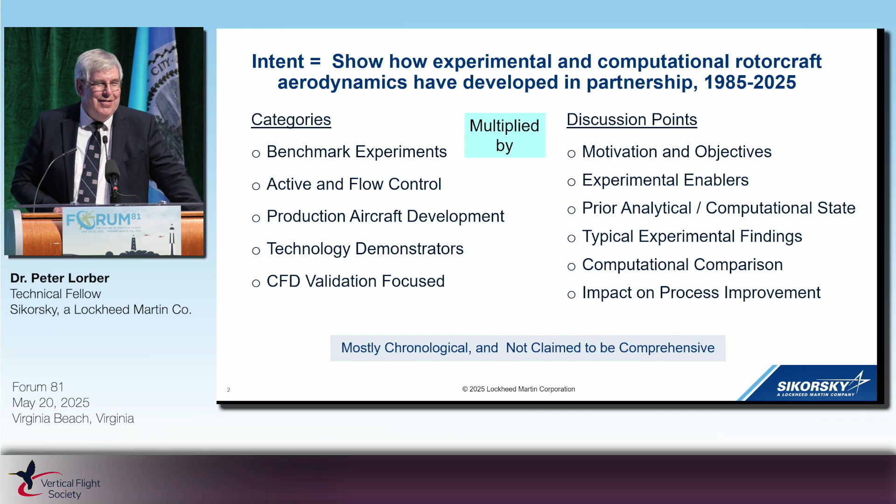This is mostly chronological. It's not planned to be comprehensive, and primarily because of the ability to get it approved through our systems, it's focused primarily on things that I and my colleagues have been involved with that have been previously published, so we didn't need to go through a lengthy approval cycle.

The first topic is benchmark experiments, and the first one is oscillating airfoils and wings, which are seemingly simple geometries but needed a very significant amount of care to get to the appropriate answers. The motivations in this period, the mid-1980s, were threefold: rotor blade dynamic stall, of interest to the helicopter community; fixed wing supermaneuverability, of interest to the Air Force at that period; and propeller stall flutter, of interest to our partner company at the time, Hamilton Standard. The idea, starting on the upper right, was an 8-foot wide blade section sitting in the UTRC wind tunnel, trying to get to realistic Reynolds numbers in the millions and Mach numbers up to 0.6.

The key experimental enabler at that point was the availability of compact, thermally stable pressure transducers that could be put into many different types of models, in this case the wing. The second enabler was a fully digital unsteady data acquisition system. It was immature at that point, but it was a great improvement over analog tapes. Also important was the ability to use high-powered hydraulic systems to generate any waveform of pitching motion of this model that you wanted.

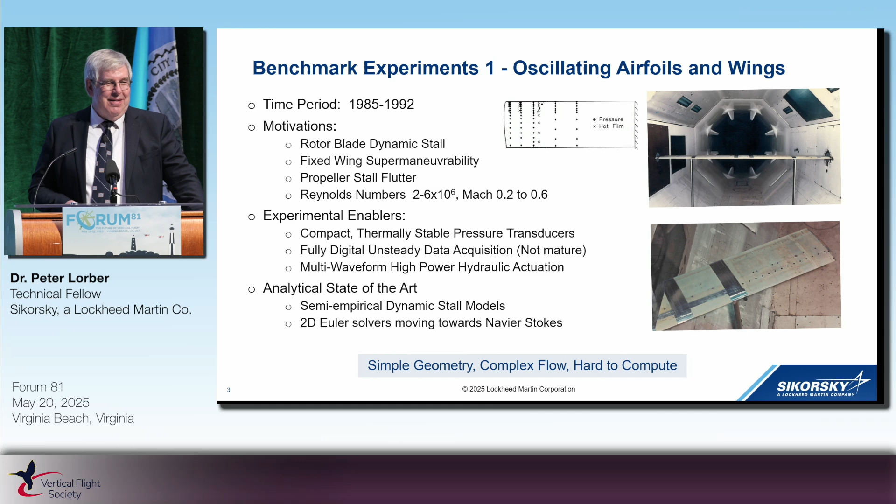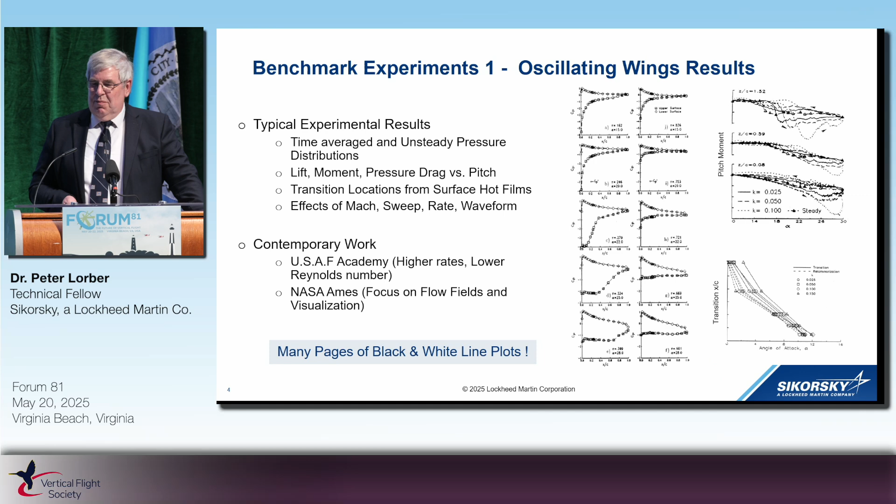Typical experimental results were many pages of black and white line plots published in that period. Color imaging was a luxury item that was expensive and complicated to do, and even more expensive if you wanted to publish it. So we were measuring pressure distributions, lift, moment, drag, laminar-turbulent transition, and the effects of all the independent parameters. Contemporary work at that time was done at many places, including the US Air Force Academy and NASA Ames.

Computation early on, in the 80s and 90s, was starting to use Navier-Stokes solution methods with relatively straightforward turbulence models. They didn't do a bad job here, they didn't do a great job. More recently, things have gotten much better - higher resolution, improved separation, separated flow, transition. It's still a struggle for these full-scale conditions. Large eddy simulations in 2017 and 2022 have been done at increasing Reynolds number, but it's still a computational challenge to get the details of the flow proper at these high flight conditions.

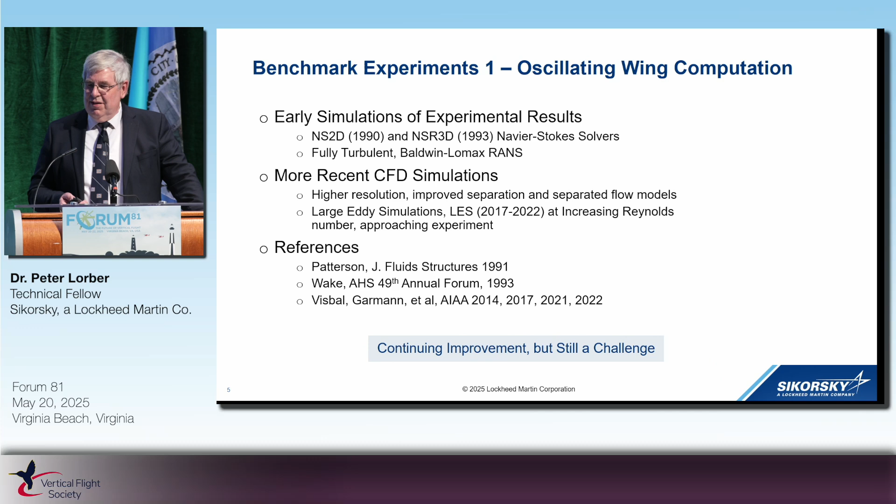The second series of benchmark experiments were on a model helicopter rotor. This was slightly later, from the late 1980s to mid-1990s.

The motivation was a multi-measurement comprehensive data set so that analysts could combine blade air loads with far-field acoustics, and blade air loads with bending and deflections of the blades. We wanted to expand the test envelope from relatively simple and safe conditions to high speed and thrust, and to change the tip plan form. Importantly, we wanted to compare a UH-60A model rotor, about 10 feet in diameter, that we were testing, with the full-scale airloads blade that Sikorsky was producing, which NASA Ames and the Army were going to flight test.

Again, the enablers were the pressure transducers - in this case, we were able to put 176 onto this small rotor blade. Data acquisition was more mature, and we had composite rotor blades with repeatable structural properties and long life. Importantly, this was a partnership between the US Army, NASA, Sikorsky, and UTRC. There was some money changing hands, but a lot of intellectual effort changing hands between all these partners over that period. The analytical state-of-the-art was again relatively simple: lifting line, prescribed wakes, comprehensive codes, beam models, 3D potential codes, starting to get to Navier-Stokes.

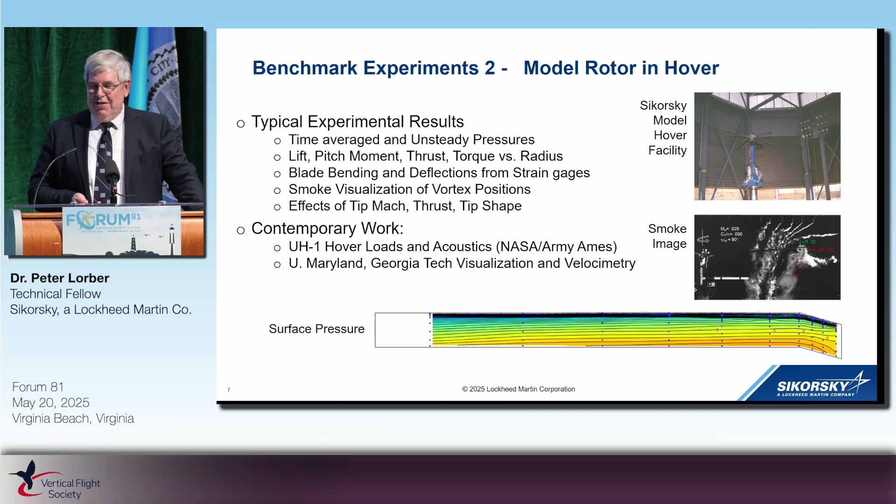Contemporary work - the Ames NASA Army folks were doing things on a UH-1 rotor before that. There was other hover work being done at somewhat smaller scale at Maryland, Georgia Tech, and other universities. Just to show that you can take data that was acquired before and make it color, that was the surface pressure contours shown at the bottom of the slide.

There were other DNW test campaigns that the Army and NASA did in collaboration with other industry partners. There was also a very large-scale complementary effort by NASA and the Army, taking the instrumented blades, doing flight testing in the 90s, and then going back and doing full-scale wind tunnel testing within the last 10 years. So this has been a long-term effort that's had a lot of benefits for the community.

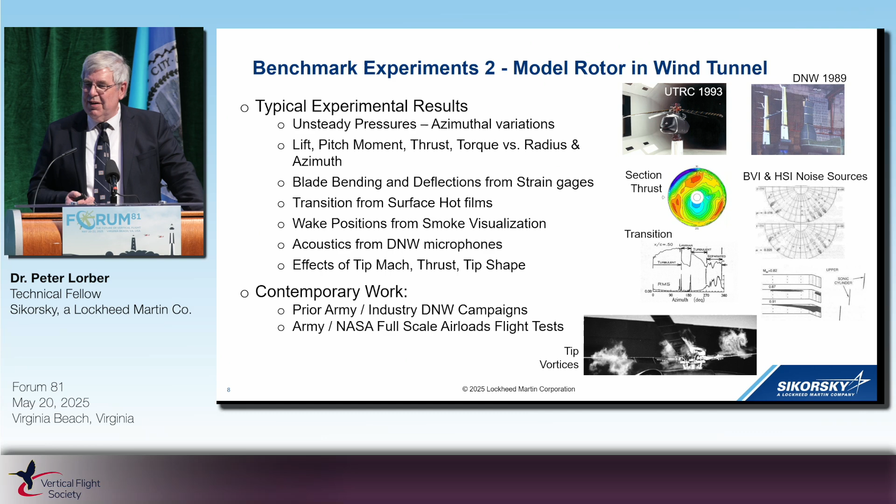CFD comparisons early on were trying to combine a little bit of data with a little bit of analysis. Prescribed wakes for hover had fair correlation. Taking the measured pressures and adding acoustics was reasonable. Taking the measured aerodynamic loads and adding the dynamics analysis back in 1992 was fair.

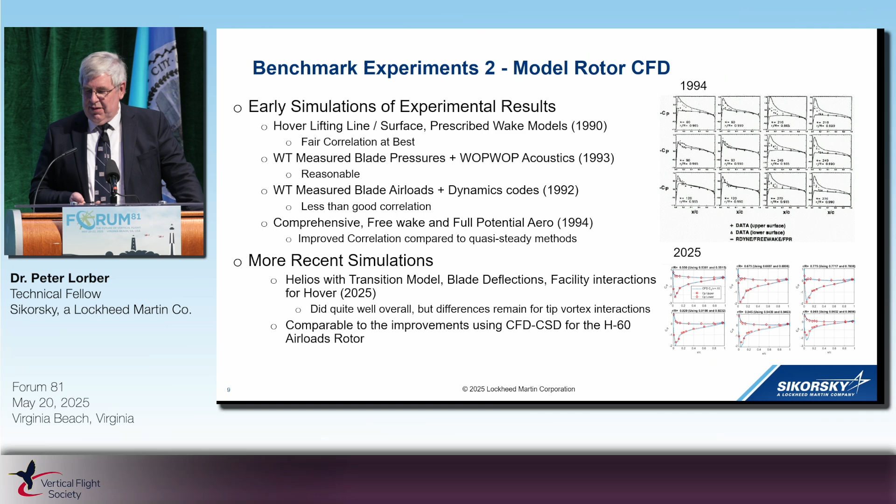Going the other way, trying to model the whole thing again was better but not great. More recently this has all been vastly improved analytically using transition models, blade deflections, and interactions. This is the most recent work done in hover that did quite well. There are still some differences, and this work is comparable to all the improvements in modeling the H60 airloads rotor, similarly with the computational CFD, CSD methods of the last 15 to 20 years.

The second major topic is active control. This was a very hot topic starting in the mid-1990s. Our involvement covered a 15-year period until 2010. The idea was to find a way of breaking the paradigm of the passive rotor and improve noise, vibration, and performance. You wanted to develop the required actuators and control systems, and try to identify system-level performance. Enablers were everything talked about before in terms of measurement techniques, but also adding the ability to make rapidly moving actuation and control systems.

There was a lot of work being done in academia from multiple of the people sitting here, Maryland, MIT, MDHC, and Boeing. ZFL in Germany was doing a lot of work on BO-105, CH-53G, IBC flight testing, and all of the HART II activities. The other piece, slightly later, was NASA ZFL Sikorsky UH-60 IBC at NFAC, which was using the same blades that we had built earlier on.

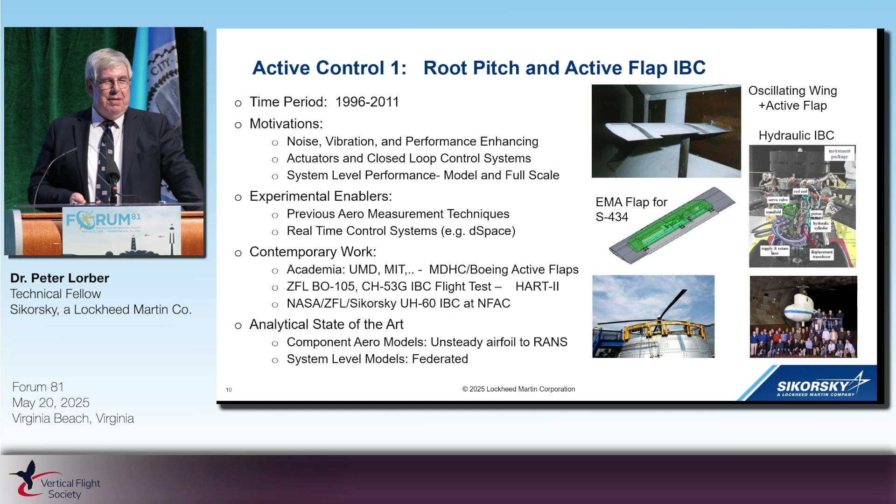So the analytical state of the art at the start of this period were component models for different pieces, an unsteady airfoil. Maybe you're starting to use some decent Navier-Stokes codes at that point, but the system models were really federated. You had a bunch of different models of different types that were kind of tied together.

Typical experimental results: one experiment was putting an active flap onto that same wing model developed before, getting pressures and air loads out to 0.8 Mach number, seeing what happens with your trailing edge flap when you're trying to do it during dynamic stall.

There were a variety of individual blade control things being done at model scale and full scale with a hydraulic actuator, trying to get there. Again, is there a performance benefit? Can you reduce vibrations? Can you help acoustics in terms of BVI? And how well is all your actuation system doing at that point?

Some lessons learned from all of this. The first one, not unique to us, is avoid hydraulic slip rings. Trying to get high-pressure hydraulic fluid into a rotating model without having a large bucket underneath it doesn't work well. Try to avoid inserting complex systems into small legacy flight rotor blades. That also is much more complicated than it may seem at the time.

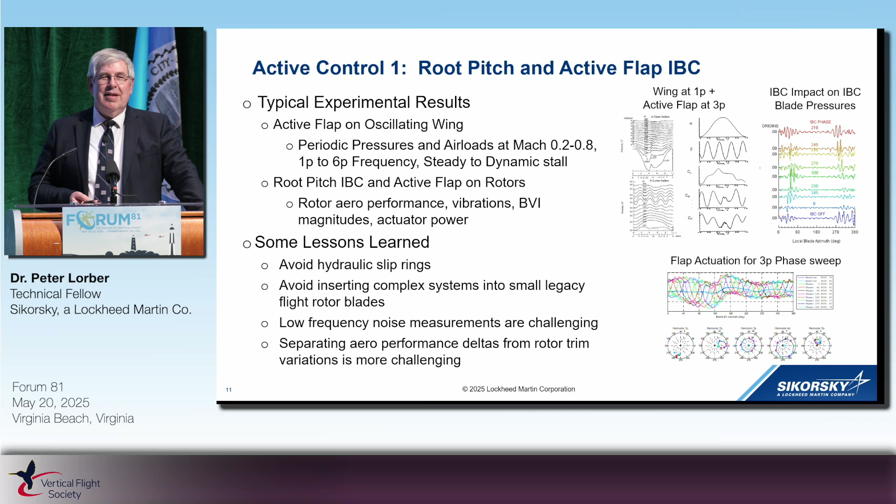Low-frequency noise measurements are challenging, even in very large wind tunnels. And the final lesson here is that trying to separate relatively small aerodynamic performance benefits from the trim of the rotor is also a challenge. But it was very educational through the period, and there are many groups still working on these active control attempts, but again, it's somewhat in the past as far as we're concerned.

The next active control piece is flow control. This was late 90s to 2004. The flavor we were interested in was called directed synthetic jets. Again, you're trying to reduce drag, avoid dynamic stall of your rotor blades, and advance the technology to do that: the flow control actuator designs and the authorities.

The basic idea of this method is that in some way you have a jet of air coming out of your airfoil, going in and out. It's helping to energize the boundary layer over the airfoil, preventing it from separating. The enablers were all the previous aero measurement and control techniques. So you're seeing a theme here that every piece builds on its predecessors.

Another enabler was system design models for the actuators so that you could do a lot of analytical work with a reduced model early on, avoiding too much experimental tinkering. Another enabler in the later period was the ability to do CFD modeling of the coupled internal flow inside the actuator and the external flow. This was part of the DARPA micro-adaptive flow control program going on at the time. We were one of several teams working on that.

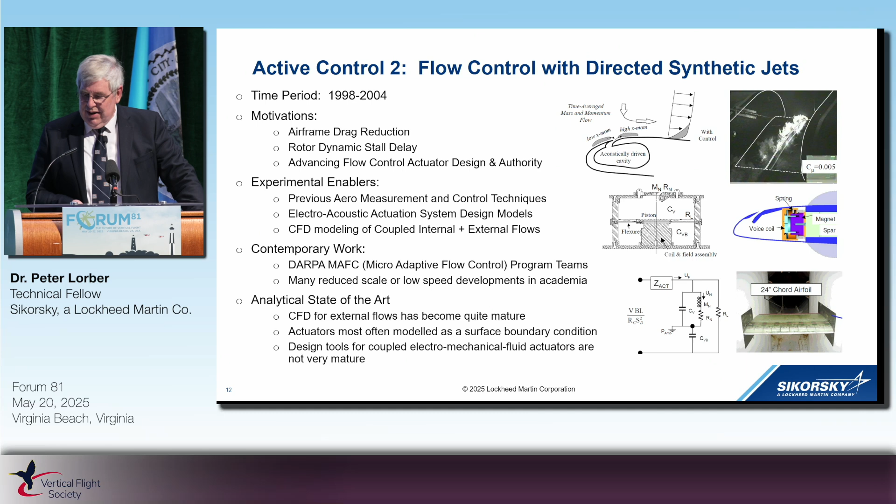There were also a lot of flow control activities going on at that time and continuing in academia. The analytical state of the art by the 2000 period: external flow CFD was quite mature, but these actuators were often modeled as a surface boundary condition. You were only later able to model the coupled system, which proved to be important in predicting the capabilities.

But overall, the lesson learned was, yes, we were able to design actuators that had the authority we needed, but in practice, at these realistic conditions, opening a slot hurts you before your actual flow control is able to help you. So we were limited in the ability to meet the objectives for the higher Mach numbers you'd see on an actual rotor blade.

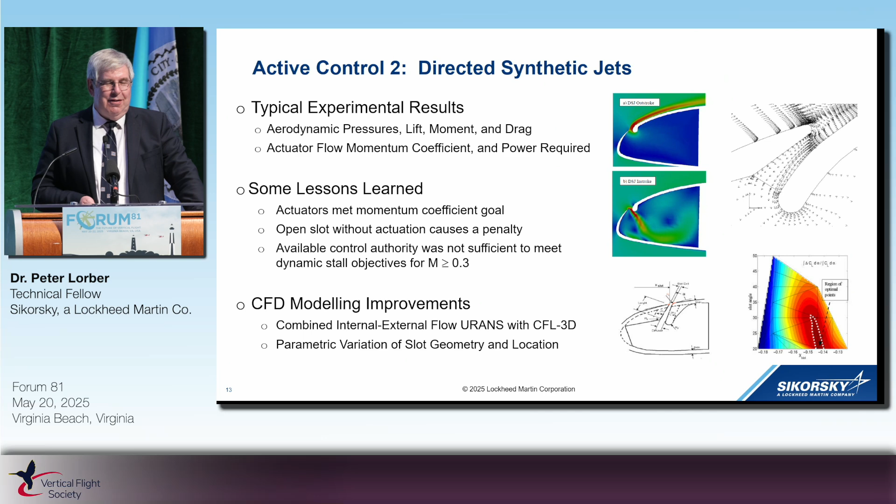So the final piece of this was a few years later, in the 2012-2016 area, where we were trying to see what was the maximum ability you could get out of a flow control actuation for a rotor blade stall. The idea again was delaying stall and adding lift.

This particular experiment, funded out of Susan Gorton at NASA, was to try and see what you could do up to a relatively high Mach number of 0.5. So the enablers, again, were the measurement techniques, the hydraulic pitch mechanisms, and all of the insight into dynamic stall and flow control that ourselves and other groups had obtained over the years.

This was also using the model in the middle there, which was a 6-foot high oscillating wing that had been previously developed under the Vertical Lift Consortium project for the Glenn Icing Tunnel. CFD modeling was doing very well here for the coupled flow.

I skipped over one of the key enablers, which was the combustion-powered actuation technology from Georgia Tech, one of our partners on this. That was really, if you're pumping hydrogen and air into the model and igniting it with a spark, that's about the strongest non-nuclear actuation system available.

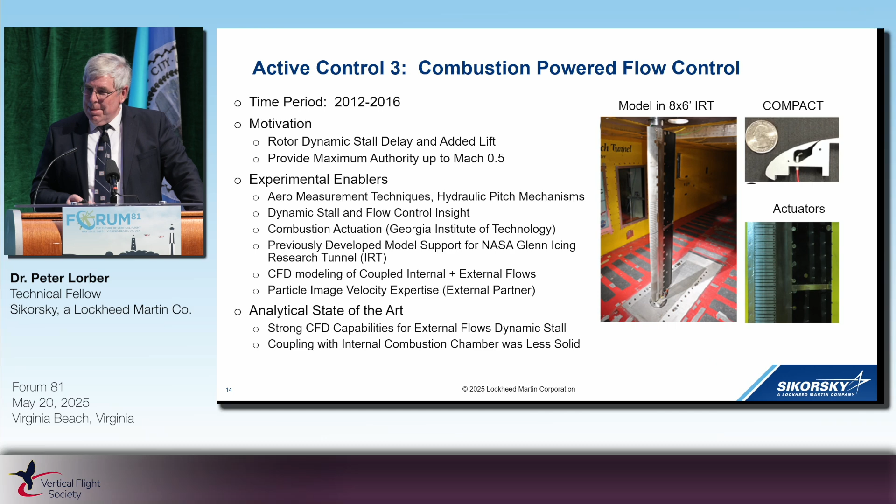So again, you're doing related sorts of measurements, measuring the pressures and lift. We are adding particle image velocimetry there to get the flow field on the model. And the computation for the airfoil was what's called the CFL3D code, slightly more sophisticated and accurate.

The conclusions were, we could clearly see the effect on flow control. The effect was primarily after stall, so you didn't really succeed in increasing the lift over the airfoil, but you did increase the average lift because you were better off after it had stalled. The CFD actually did well for design and capturing the trends.

The issue became, when you're looking at trying to move this onto a rotor, delivering gaseous hydrogen through a slip ring from a shaft out to the blade would be seriously challenging - even harder, I think, than delivering hydraulic fluid - and obviously could potentially have very serious consequences if things leaked.

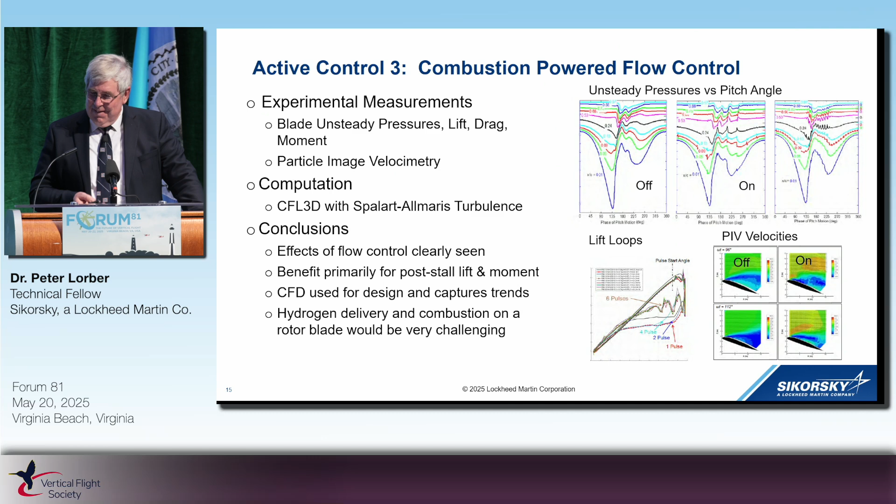Okay, so a sidebar - I mentioned PIV. The maturing of flow velocimetry over the past decade or so has been a very important addition to the experimental toolkit. The legacy was you would measure one location at a time with a hot wire or a laser Doppler velocimetry system. This required a significant amount of test time, which is a significant amount of money.

In the early years of PIV, in the mid-90s, it tended to require a local expert as a full-time activity to develop and operate, but at that point the resolution and the ability to go to a large distance was limited. In the middle years, such as in the previous experiment, more capable systems were developed. It was mostly smaller scale, but it still tended to require a full-time expert to operate.

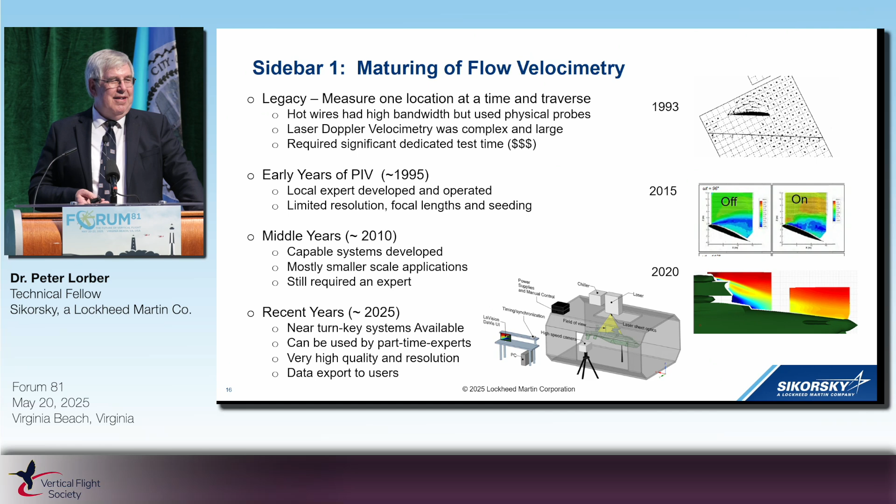More recently, near turnkey systems are available for an affordable cost, and they can generally be used by what I'm calling a part-time expert. We're able to get high quality and resolution and then export data to other users relatively quickly. The bottom is an example of that in a small wind tunnel that was added in, getting the flow field behind a model - this is a steady image, but you can do the same thing for unsteady. So that's been a significant technological improvement over the past, say, 20 years.

Okay, so now we talk about production aircraft. Production aircraft development programs were historically probably the most important use of the wind tunnel for actual industrial users.

The technology in developing it was largely empirical, based on prior programs, empirical relations, handbook drags, and certainly in the 70s into the 80s, the analytical methods were limited. So you really were required to get all of your data essentially used in the design and pre-flight out of the wind tunnel.

You needed, for a development program, to have new technologies previously qualified. You weren't really trying to go in there with a new rotor blade. That had to be established in a prototype sense. You started out with a small-scale airframe, trying to get basic

design characteristics, vary them around, then went on to a larger model, such as seen on the right here. And then in the 80s, you started adding powered rotor models to your fuselage as a matter of course. But through all of this, I think flight test was still remaining the primary way to find system-level issues.

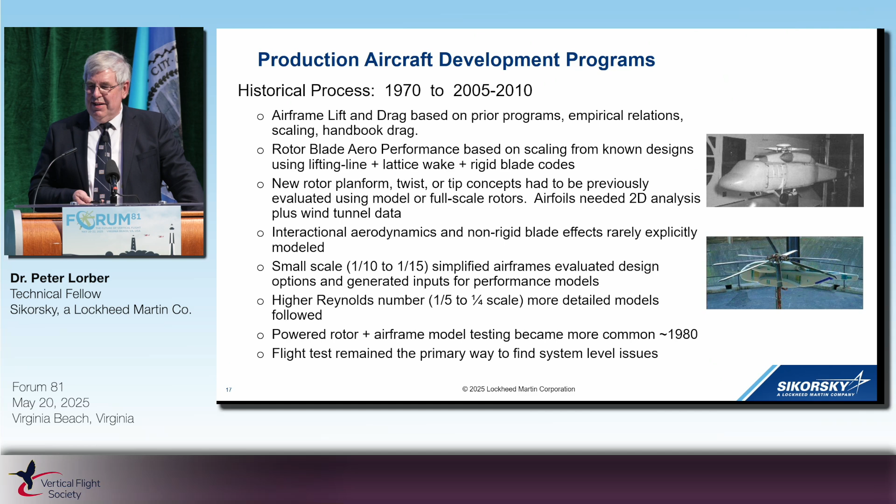So what did you do for wind tunnel testing in a development program? The number one thing was, what are the forces and moments? What's the lift, the drag, the moments on the fuselage and on the rotor? You would like to know what are the loads on the blades. You'd like to know pressures in a few locations of interest. You might put some tufts on it to identify some of the basic flow field features.

You added other things on a need and budget available basis, such as pressure measurements for interactions, flow-through or aspirated engine inlets, hub accelerations. Sometimes you added a powered tail rotor. You did dynamically scaled empennage. There was a period where Dynamics was also doing rotor testing to try and get optimizations.

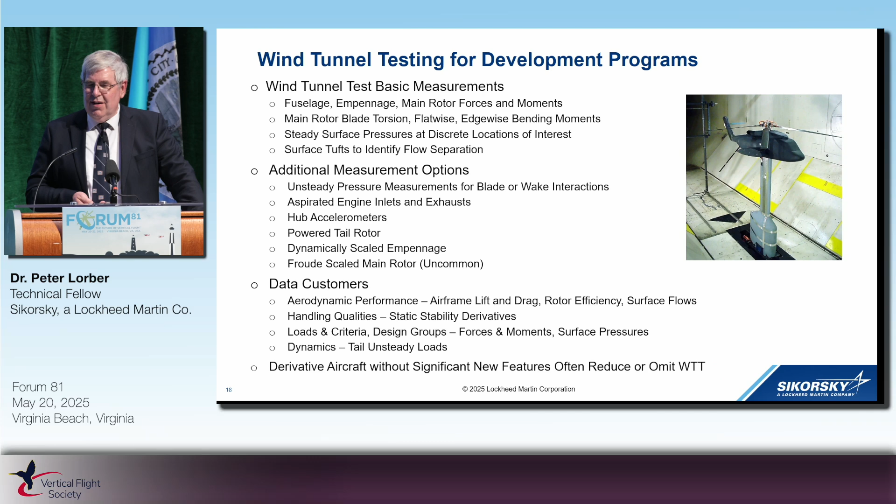Customers, aerodynamics, handling qualities, loads, dynamics. I will mention, however, that derivative aircraft that didn't have significant new features, even in the earlier days, often were able to omit or reduce the quantity of wind tunnel testing.

So over the last 20 years, there's been continuous improvement, but at a more rapid rate. In the CFD analysis, components have been grouped into larger and larger systems. You're currently in the position where you're generally able to simulate the full aircraft with tail rotors, main rotors, inlets, exhausts, internal flows, dynamics and structures.

Adding coupling between the rotors and the fuselage, both aerodynamically and structurally, and very recently, co-simulation putting the control systems in. The challenge remains to make it all happen quickly and reliably. And no, I'm not showing any CFD animations in this paper. There are plenty of other presentations out here for the next few days that you can see that.

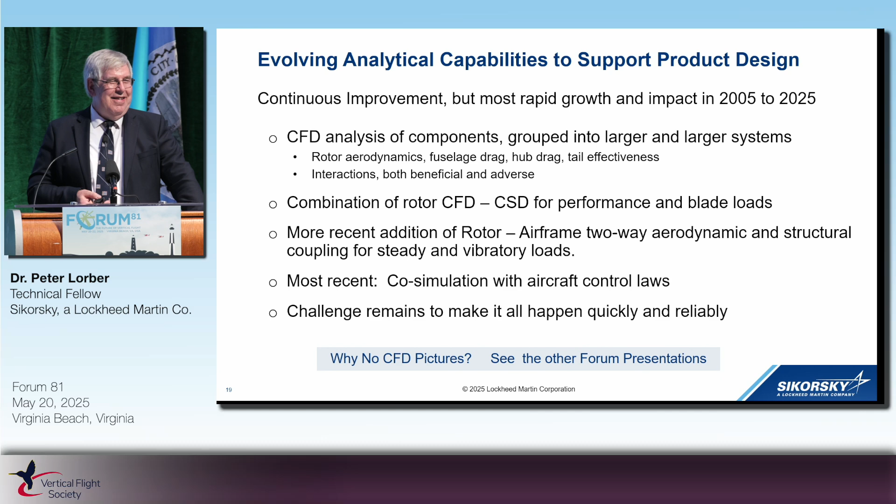Okay, the next category in development leading to an aircraft is technology demonstrators. They're different in the sense that a technology demonstrator is trying to prove some specific capability. It's not trying to get a unified aircraft that you're later going into mass production. So your analysis and experiment needs to focus on what's required for safe flight, what are you trying to demonstrate.

And try and avoid unexpected results from flight test, or if you were not able to avoid the results and you get them, then you need to try and figure out what happened and how do you fix it. Some examples in our company have been the X2 technology demonstrator 2008, the Raider in 2010, and the rotor blown wing that is going on now from 2023 into 2025.

I'm going to talk on the rest of this slide on the X2 technology demonstrator. That was what we call a rapid prototyping process. Analysis in the 2008 term for these configurations was kind of limited. There was no pre-flight wind tunnel testing done.

The rotor design was made by one of my colleagues in the room, Dr. Bagai, using relatively simple methods plus deep aerodynamic insight. The fuselage was designed empirically, and it had a simple shape as shown in the upper right. Didn't have a lot to be analyzed.

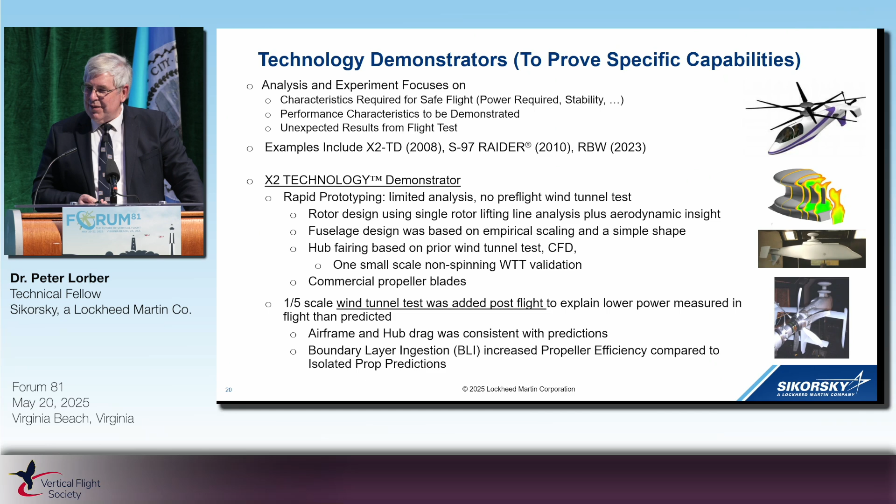The second half of this was the S-97 Raider development, which was a few years later in the 2010 to 2015 process. Analytical tools were improving, but high-performance computing resources were still quite limited, and it was focused more on computationally analyzing one component at a time, using different tools for each.

There was a series of wind tunnel tests conducted on the airfoils, the airframe, and the hubs, since the hubs are a high drag mechanism. That culminated in a 1/3 scale powered coaxial rotor and airframe model, a new test rig that was tested in several entries out at the NFAC at Ames.

A few years later, when you got into flight test, considerable effort had been applied to improve the CFD-CSD tools. They were also available then to support flight test and develop fixes for issues with the aircraft, and then also for follow-on pieces.

So you've moved along a little bit, doing a more co-equal collaboration between the computational methods and the experimental methods, learning as you're going in both cases, and then applying that knowledge to the next iteration.

The second sidebar is model fabrication. In the legacy period, small airframes were handcrafted from wood. The large airframes were mostly handcrafted from fiberglass, metal, and wood. Instrumentation was sparse. In the 2000s, CNC machining of metal structures was common.

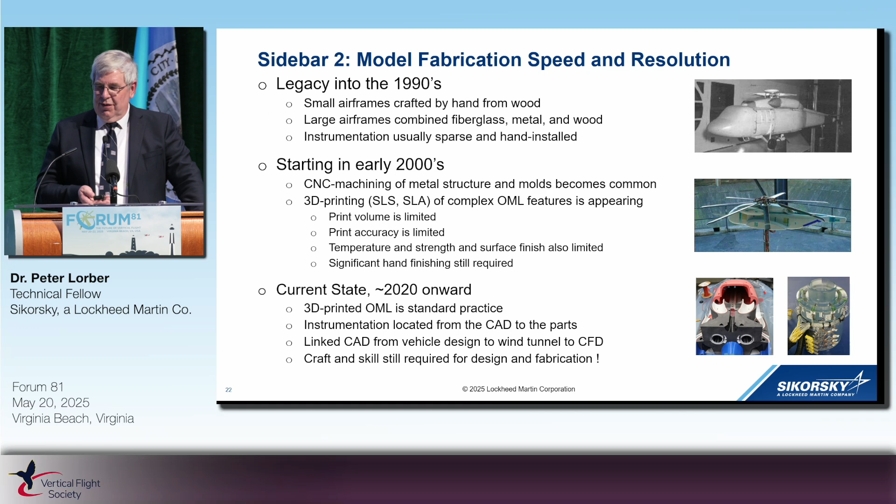This topic is focused on CFD validation. This has become more important over the past few years, when you're trying to get some data set that can be directly used in CFD.

This first example was somewhat accidental. The experiment was an add-on to a development program on the S-92 in 2000. The motivation was rotor and airframe wakes on empennages was a concern. CFD models at that time were not mature enough, and there was very limited computational capability to practically address it. So the idea was to make detailed flow field measurements and surface pressure measurements on the model at the end of this particular development program entry. The enabler was a 3 velocity component traversing hot film system available from a previous program.

The horizontal stabilizer on the aircraft had 40 unsteady pressure Kulites into it. That's what the middle image is showing, the pressures on the upper surface of the horizontal stabilizer as the blade passes by. The data systems were more sophisticated there, so you could actually get a large data set in one week, which was an affordable activity, even though it was partially shared between Sikorsky and UTRC. Even Dr. Ken Rosen was willing to put up the money to do that.

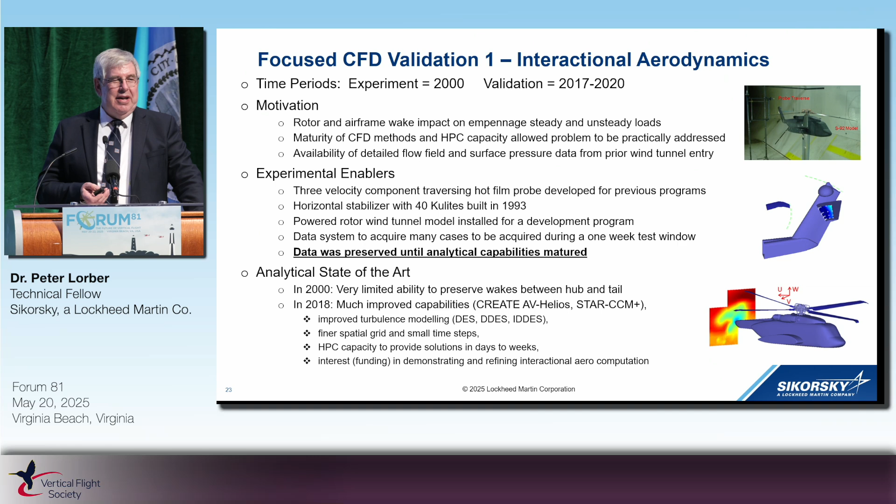The last example here was the most recent one, 2022 to 2024, focused on spinning coaxial hubs. The motivation was trying to understand the impact of the wake of the hubs and blades eventually into the empennage, into the propulsor. CFD maturity and HPC capacity was there to do this problem, but we still wanted to get a good validation data set.

This took advantage of the 3-component PIV system that was available. It took advantage of high capacity pressure tap measurement techniques, and obviously very large, complex 3D printed components which were needed to do this in a reasonable amount of time.

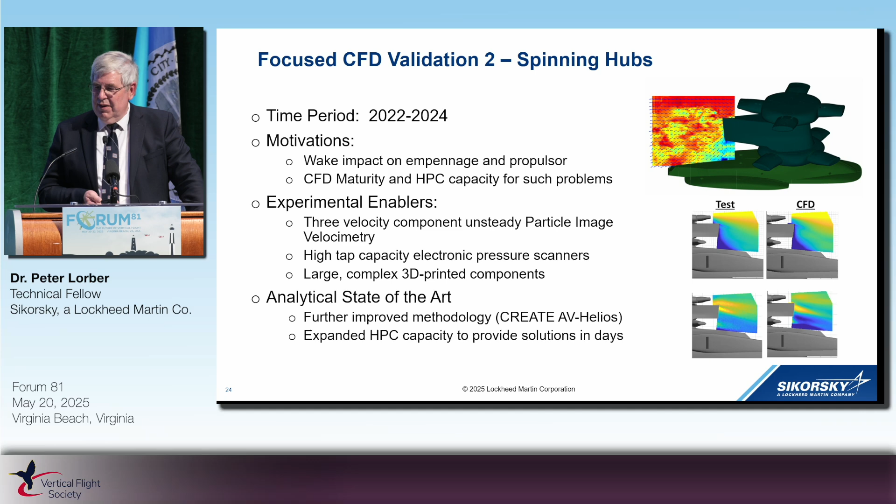So this took advantage of Helios' improved capabilities, and again, you're able to provide solutions in days. The video at the top is the PIV data showing the wakes coming off of the rotors and hub. Red is free stream full velocity, yellow is reduced velocity, and blue is full wake pieces. There were lots of comparisons between test and the CFD tools, and that was doing quite well.

We basically were able to conclude at this point that this was a solvable problem using the analytical methods. So why so little talk about data systems, since that's one of the things I've spent a lot of time on over the decades? 40 years have produced a massive increase in the bandwidth, the processing speed, the capacity, the channels, the number of screens to show the data, the complexity.

But the principles have really remained the same. You want to acquire what you need, not more because that just takes more time and effort, but certainly not less. Know the conditions at each point—that's been an issue that's continued in many cases. If you have multiple systems, you get different answers, so how do you synchronize them? You really want to have them all tied together.

You want to have things simultaneous, and you monitor really only what's important in real time. We've had situations where, because I can monitor hundreds of parameters for safety of flight, you then have hundreds of parameters that can cause a false positive and get you concerned. So again, acquire what you need, not more, not less, and also understand your uncertainty. How accurate are your data? What contributes to it? And how does that feed into your correlation?

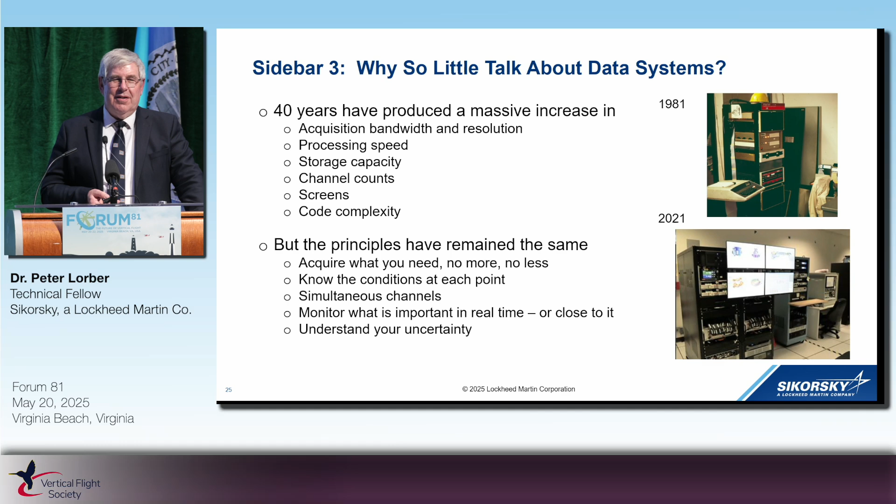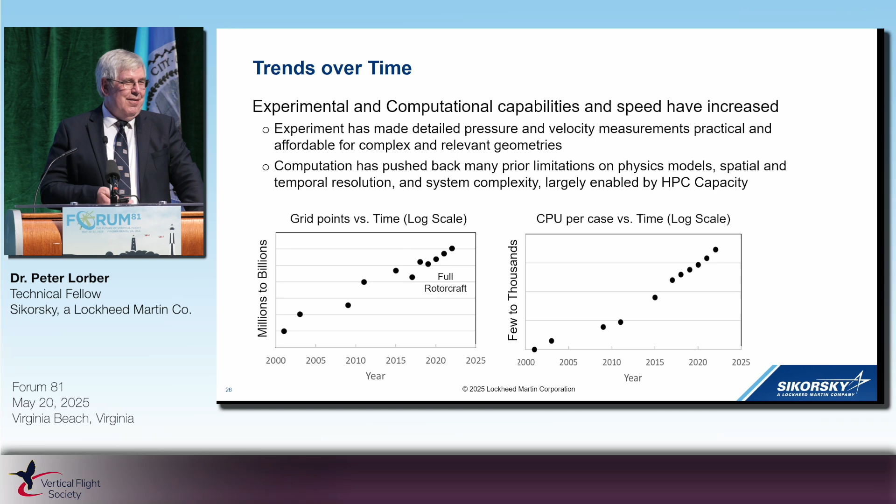In the case, timing has also dropped—again, a log scale. This shows how many CPUs per case versus time. So you've gone from a few cases over a certain amount of time to thousands of cases over that same amount of time. So your capabilities have gone up.

However, there's still a need to think about some things that haven't changed. The focus areas have varied: started with benchmark experiments, simple geometries, focused on mechanical and flow control devices, all the way along to product development technology demonstrators, and more recently a focus on validation for complex systems for analysis—which in some sense is wrapping back around to the benchmark experiments of the earlier days.

You want to take some configuration, accurately measure it, take what you need to take, and then compare it with your best physical understanding, either analytical or computational. Capabilities to produce data, both experimentally and computationally, have vastly expanded. New vehicles are more complex, and the models of them are also complex. There are, of course, because of that, more opportunities for unexpected issues to arise, and obviously more opportunities to optimize the system to get the best out of it.

But I maintain there's still a continuing need for human intelligence in the middle of this, cross-checking both the multiple numerical models and the multiple physical models. It's always easier to find a problem if you have some idea that there's another person working on it with the same, better, or different method getting that out. Thorough examination of the results: do they make sense? Are they consistent? If they're not, dive into it and try to figure it out. If they do make sense, still dive into it and try to figure it out.

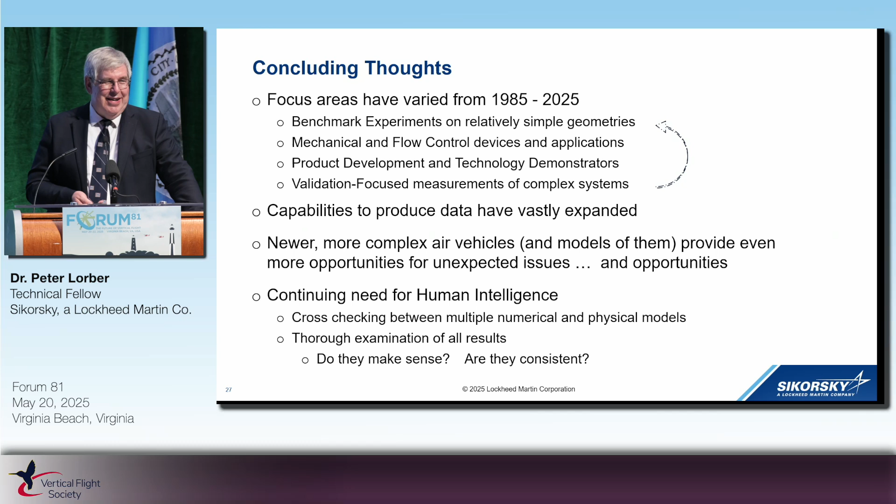So I think that is the end of what I had prepared to talk about today. I think we have time for a few questions.

All right, I get the first question. That's awesome, very cool presentation. Thank you. You showed a lot of computational and experimental work, and a lot of times, especially as students, we see experimental versus computational. So I'd like you to share your thoughts on looking to the future, how we as engineers can make the most of both of these tools, computational and experiments, to do our jobs as best we can moving forward.

Thank you. I think you clearly need to look at both of them. One of the things done in the early period experimentally that's not done now is using your model to generate massive databases of things. At that point, that was the only way, not only in rotorcraft, but also in missiles and fixed-wing aircraft. You have tended to change from testing everything to a focused experiment to measure things you either don't understand, that are new, or enough to provide touch points for the analysis to tie to. There still are some cases where you're taking thousands of different conditions, but you can often identify the few hundred good conditions that span the space of the experiment and the physics you understand well, versus having to directly feed the output of the wind tunnel test data into your application.